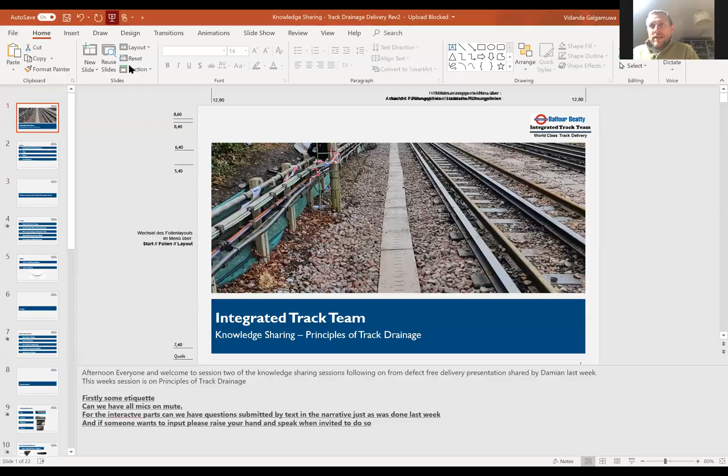John graduated with a bachelor's degree in civil engineering from Cork. I'm not sure if it's a coincidence that the first two presentations have been done by Irishmen - in historical parlance, I would say we'd be called cannon fodder, but on a serious note, John has an extensive CV, working initially across heavy civils projects and infrastructure projects.

He joined ITT in 2013 and has ever since been the go-to guy for anything drainage related. He's going to share some of his expertise today on his experience renewing the tube's extensive and varied drainage system over the last 7 or 8 years. So without further ado, I'll pass it over to John.

Thank you very much, Damian, thank you for the glowing reference. It's hard to believe I've been here for 7 years, but seven very enjoyable years. So thank you for giving me the platform to pass on some of the knowledge I've gained over the last 7 years working on Track Partnership and ITT, and sharing it with wider audiences.

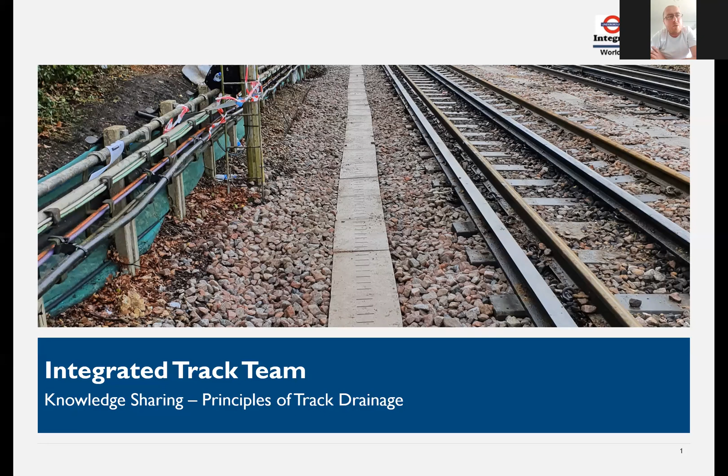Quickly going through the agenda for today: first, we're going to look at what purpose track drainage serves. Second is design - some of the design requirements you need to look at for a good design. Third is materials used, some existing and some new. And finally, we'll look at renewal techniques, both traditional open cut methods and trenchless techniques like CIPP lining, pipe jacking, etc.

So what purpose does track drainage serve? I'll give people 30 to 60 seconds to throw out some suggestions - there are 5 in all, and then I'll run through them.

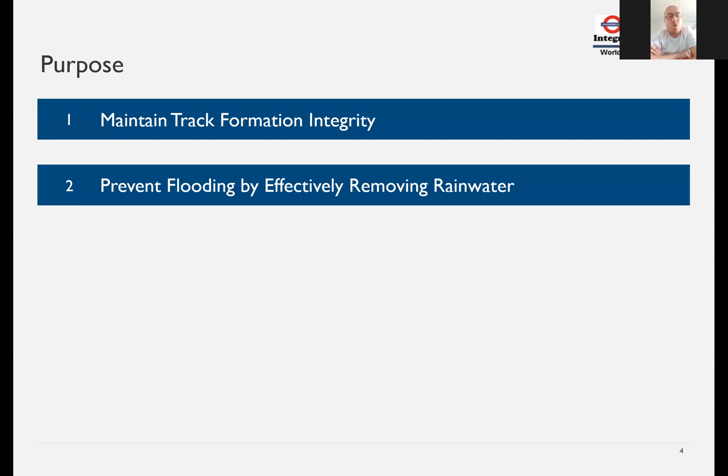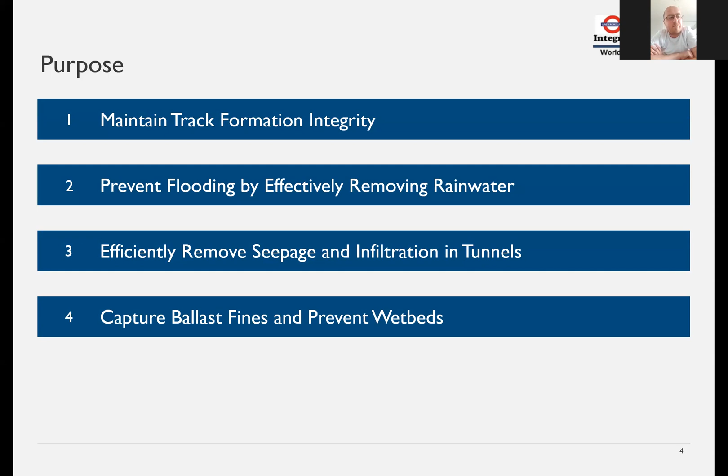So yeah, I've seen a few come through there. A few people obviously have a bit of knowledge already.

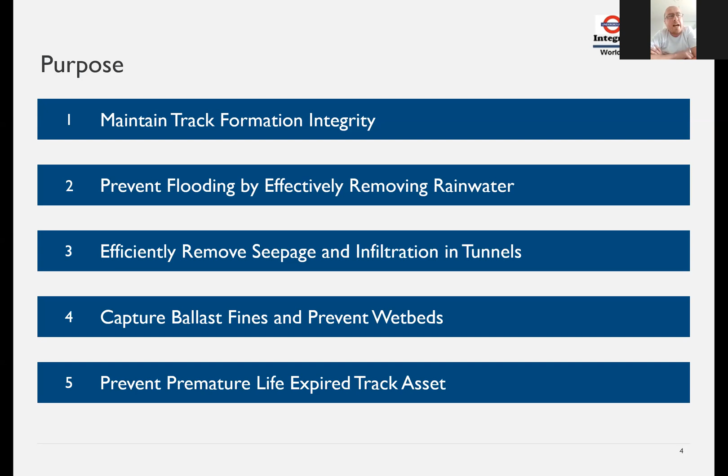There are two types of main drainage: positive and natural. Positive is basically pipe, channel, ditched drainage, and it's required when there's no natural percolation through the ground - so where there's a solid invert to the track, such as a viaduct, bridge deck, or tunnels, where the subgrade is impermeable. So if you have a silt or clay material, where the capacity of the subgrade to accept water is poor. That's common when there's soft chalk, and also in areas of flood risk, which are low points in the track. Natural, in effect, is the opposite - it relies on the ability of the ground to accept rainwater flows. That's in areas where you have good sand, gravelly, good quality permeable chalk. You can also have sustainable drainage systems like soakaways as well.

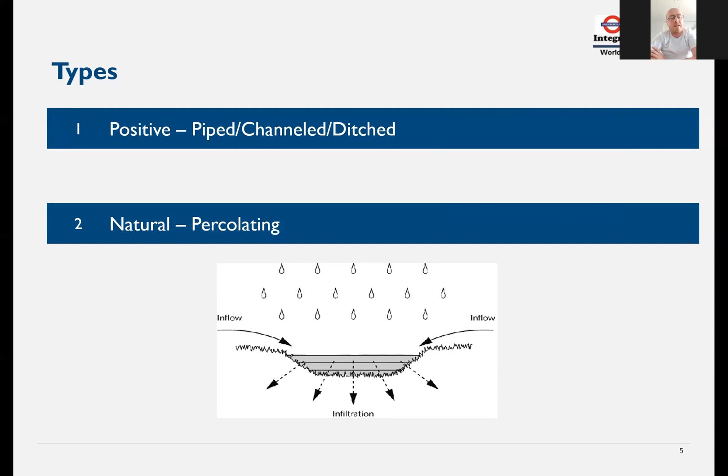Moving on to the design. There are five key requirements with the design. The first one to look at before you commence the design is to review the history of flooding in the area, any reports on flooding and such like that.

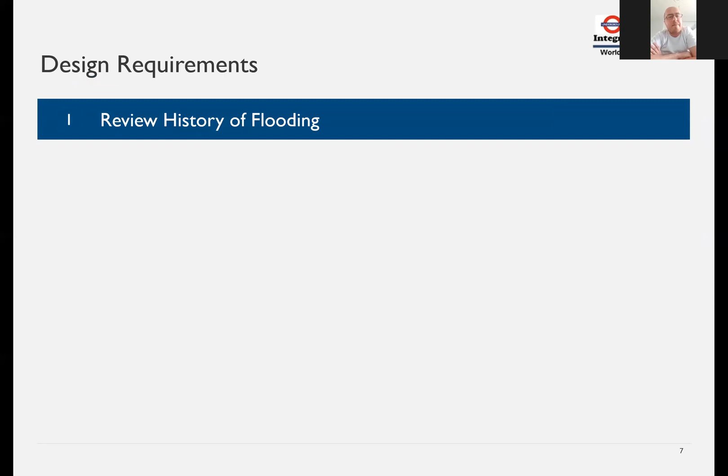Then you review the site hydraulics. This involves assessing the catchment in its entirety - surveying the catchment, identifying the location of the pipes, the size of the pipes, and then modeling that existing catchment and seeing how it reacts to different types of storm events. So 1 in 5-year storms, 1 in 10-year storms, 1 in 50-year storms. Once you have that, you can see the impact the flooding has, and then whether you need to upsize pipes to meet the requirements of the modeling you've inputted.

Once you've identified your proposal, you can move on to review the condition of the existing pipes. You look at the condition of the existing pipes and the requirements of the proposal, and see in the catchment where you might be able to retain some pipes. For example, you might have a pipe which hydraulically works, but structurally has holes or fractures. So it might work hydraulically and be the right size, but need some renewal work - you might need to line it, not necessarily a full renewal. By establishing the structural serviceability issues of the catchment, you can identify what work you need to do, giving you a defined line of what to retain, what to renew, and what to rehabilitate by CIPP lining or slip lining.

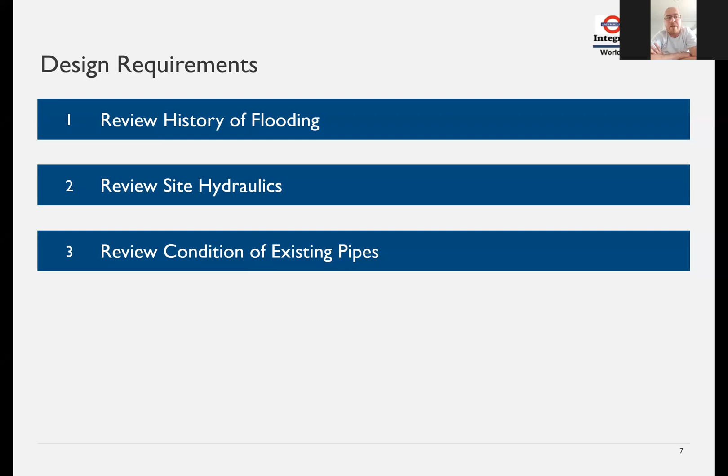Number 4 is construction technique and buildability - making sure the design is buildable. We've had many instances where designs were issued for approval for construction, and when we walked the site, we realized a lot of the design input wasn't feasible. For example, open cut renewal where signals are in the way, channels to be installed where signals are in the way, or other places where there's insufficient space to install drainage through bridge abutments or through narrow six-foots. So it's critical that what you put down on an AFC drawing is actually buildable.

And finally, the last design requirement is to highlight areas of high risk - areas where you're excavating over Thames Water sewers, areas where you might have potential asbestos intrusion, Japanese knotweed, stuff like that.

John, before we move on, there's a question that's come up. Someone's asking, what do we do first - generally what's best practice, a P-way track renewal or to do the drainage first for a renewal?

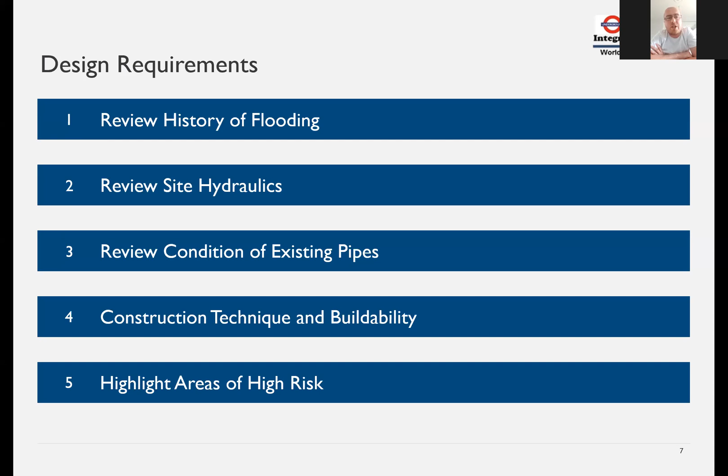Ideally it'd be drainage first, particularly if it's pipe. If there's a risk that the drainage may be damaged by a track renewal, then obviously you do the track first - that's generally the case when you install channel. I know when they did the renewal at Wimbledon, doing pipe and track together, the line of the channel was impacted while trying to do the track bed formation. Also up at Harrow, we commenced installing some channel, but once they did a P&C renewal, the channel basically moved and got damaged, so they ended up stopping the overnight renewal - we were doing the channel overnight and decided to do that post the works. So to answer your question, as much as possible, especially if it's a pipe, but when it's channel, it's best if it goes in second.

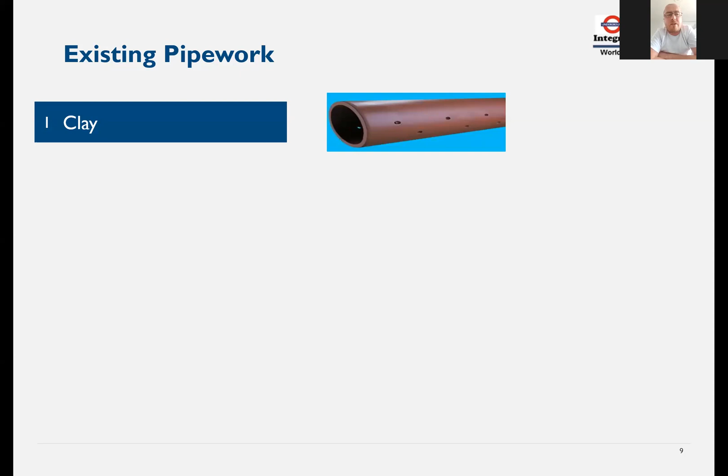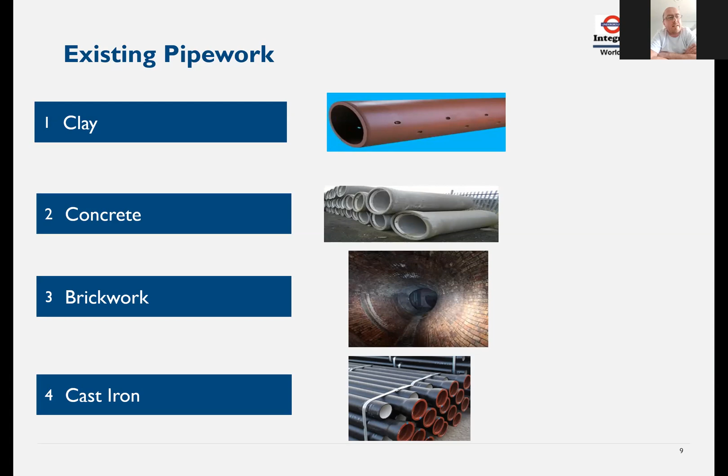That's probably the second most common. Thirdly, you have a lot of brickwork, especially brick over culverts in the subsurface, like down through the District line. These can range from 400-450 mil diameter up to as big as the ones at South Kensington platform, which are 1100 wide by 800 high - quite big structures, dating back to the 1860s, there since the track first went in. You also find bits of cast iron here and there, though not very common.

There's a question from Declan: does installing a drainage channel eliminate the need for crossfall when carrying out a BTR? No, because you should always have crossfall, since it needs to fall in the direction of the drainage. If you don't have crossfall, it's probably just going to sit in the track bed. So it needs to be cut in the right direction toward the drainage.

Regardless, that track channel will need to be below formation in order for it to be collected and work properly. There's also a question from Zach: at what point do we capture the effect of infrastructure development around an area, as this can affect site hydraulics? Runoff from associated infrastructure would be picked up in the hydraulic modelling of the catchments - the micro drainage model will pick that up as part of the hydraulic modelling when you set all the storm events.

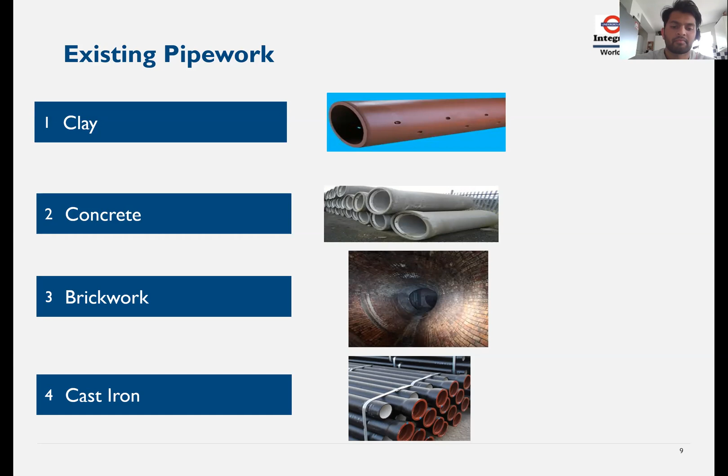Moving on to some of the new pipework we install - most common is plastic pipe, and there are two types we generally use. The first, on the left, is a Rigitrack pipe - a lightweight poly pipe, twin wall ribbed, only 18 kgs for a 6 meter length. It has a longer length so fewer joints, but needs coupling - unlike the pipe on the right which is a push fit connection, this one needs a collar for every joint, which is a bit more painful. It's measured by internal diameter and comes in sizes from 150 mil up to 600 mil, and is more environmentally friendly than the pipe on the right because it incorporates recycled plastic in its makeup.

The pipe on the right comes in two types: a Terraline, which is a solid pipe, or a Terradrain, which is in effect a filter pipe. It's heavy duty, quite a bit heavier than the poly pipe - a 3 meter length of 280 is about 40 kgs. But it's very durable and heavy duty, so it probably has a better long-term life cycle than the poly pipe. It also comes in different classes: SDR11 or SDR17. SDR11 is for a shallower depth and for areas of higher loading.

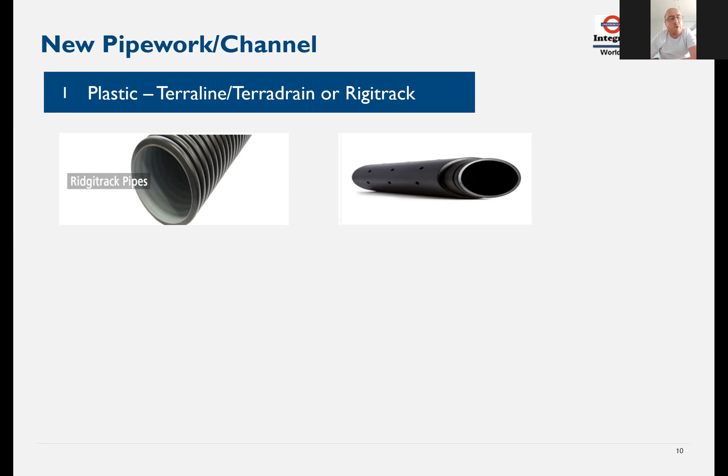Moving on to channel. Channel comes in two different sizes, a 150 or 300 mil internal diameter. Each unit, whether it's a riser or a base, is 750 mil long. Usually the makeup is one base, 3 risers and a cover, in order for it to get below the track formation and effectively drain the formation correctly.

One thing about channel is there's a lot of manual handling. For example, if you're installing a 3 meter length of channel with 3 risers in the same area, you're installing 20 units including lids. That means there's a lot of on-site storage required to lay out the channel and prep works, or more space required on the trains compared to pipe.

It's also quite more expensive, approximately 10 times per meter length than a Demco pipe, which is the Terraline pipe, the heavy duty stuff. The advantage of channel is its greater storage capacity. It works better hydraulically in flatter catchments, and due to the extra storage capacity, it doesn't need to be as deep, so it can be installed shallower.

One other point is it's supposedly easy to maintain, but that's a bit debatable because we've had issues trying to clean it out in the past after we installed it.

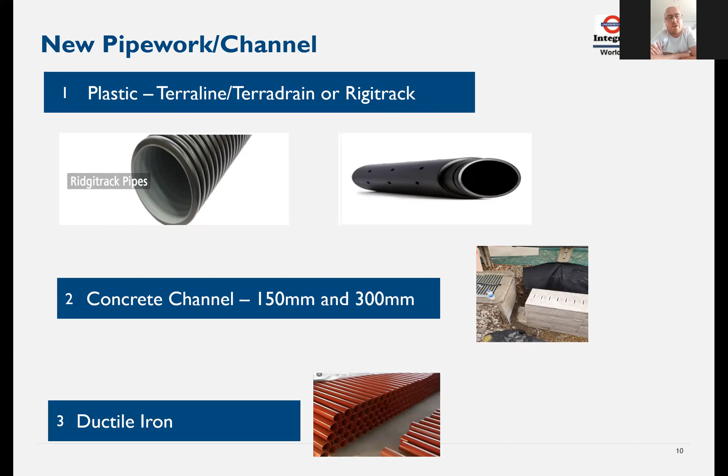Finally, the other pipe we use is ductile iron, which generally is only used in shallow UTXs and 4-foot drainage. We've used a bit of it in B2F and installed drainage up to 4 foot, but other than that it's not really used very often.

Before we move on, John, a couple questions. Simon's asking, why do we install channel rather than pipe? What's the decision process behind that? I guess it's probably down to the hydraulics.

Basically it has greater storage capacity. So even if you install it and you don't need the entire capacity, with climate change and stuff, you know there's built-in space and storage for the future. You might be installing pipe work which is satisfactory for now, but maybe in 20 years' time, due to climate change, your hydraulic volumes might be larger. So at least you've built in capacity with channel.

And as I said, it also works better in flatter catchments, so it's just better to install channel in flatter catchments than it is pipe. So those are the two main design reasons.

Lee also asks, is there an opportunity to use GRP channel in the future instead of concrete channel, maybe to keep cost and manual handling down? Yeah, that was discussed at the drainage hackathon a few months back. The supplier of the concrete channel who was there said GRP would definitely be an option, but we need to get back to him with almost set meterages of what kind of meters of channel we'd require.

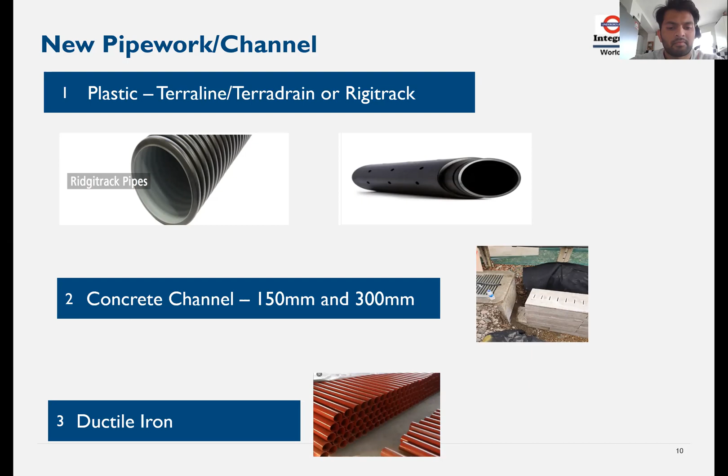Moving on to the next slide, running through the materials we use. Starting from formation up, the geotextile we install is Terratex, the same as predominantly used for the track. This is to prevent the movement and loss of fines from the track sub base.

On the drainage Terram, you overlap the upstream geotextile on top of the downstream. This is to prevent ingress of subgrade fines, and should be lapped with the track geotextile or else rolled down protected. If the BTR hasn't happened before the drainage, generally the Terram is brought up to track formation, rolled up in a 500mm lap, and drainage guttering placed on top. So when the track renewal happens, the drainage Terram can be lapped into the track Terram, giving integrity and uniformity of Terram throughout the track formation.

If the drainage happens post, then the drainage Terram needs to be lapped into the track Terram, which should have a bit of through overlap.

It's a single size filter, so it's usually a 10-20 shingle. In areas where you can reduce the shingle bed down to 50mm, but in areas where you have to reduce less than 50mm, it needs to be bedded on a C40 haunch. Otherwise, you don't get this effective support on the pipe, and it will just settle.

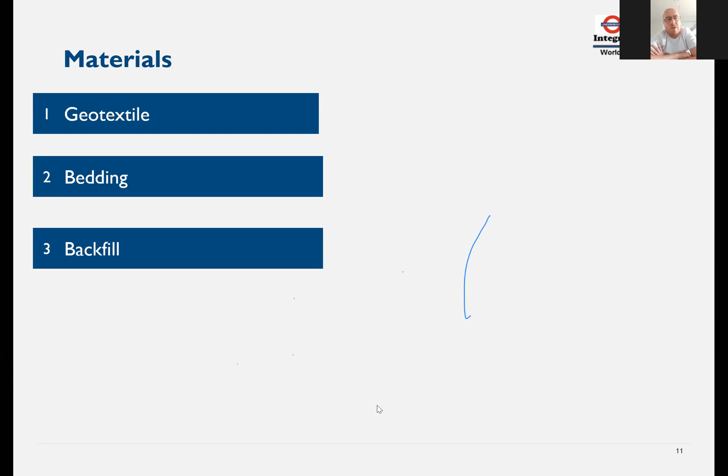In the carrier drain, you can basically backfill on top with a selected fill. So in effect, it's just good quality material with no rocks, bricks, tree roots, stuff like that. So that's basically for carrier drains.

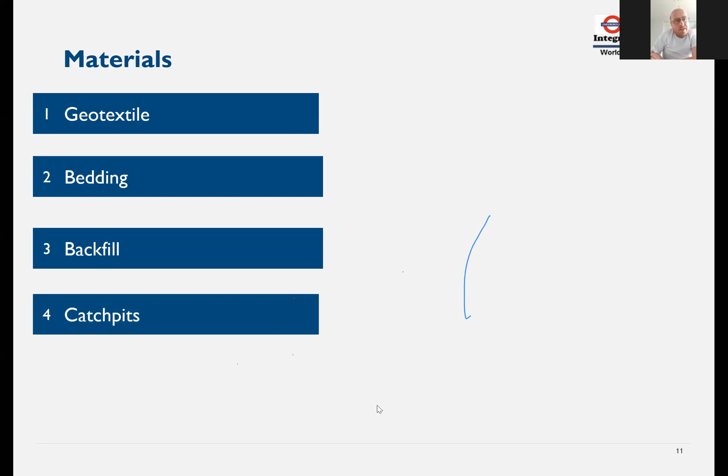Then moving on to catch pits. Catch pits are required to inspect and maintain pipes. They should be no more than 30-meter spacing.

That's basically generally for new designs. There should be a change in direction or a pipe size, and they should have a sump to collect debris and silt. You don't need to have every catch pit or every chamber as a catch pit, but you should have as many as possible - I think at least one every 3 or 4.

It also provides access for pipe inspection and maintenance. So obviously, if you need to carry out any CCTV and jetting, the chambers need to be of a certain size, which is generally 1200 by 600, so you can get man entry to clean and jet.

So the GRP rings are at 150mm depth, and then they're just built up to the sleeper level as required. The top ring has a recess, so you can fit a GRP cover.

Cubis also supply reduced Cubis catch pits, so they're 530 by 380 internal diameter. They're non-accessible, so they can only be manual. You also have a combination.

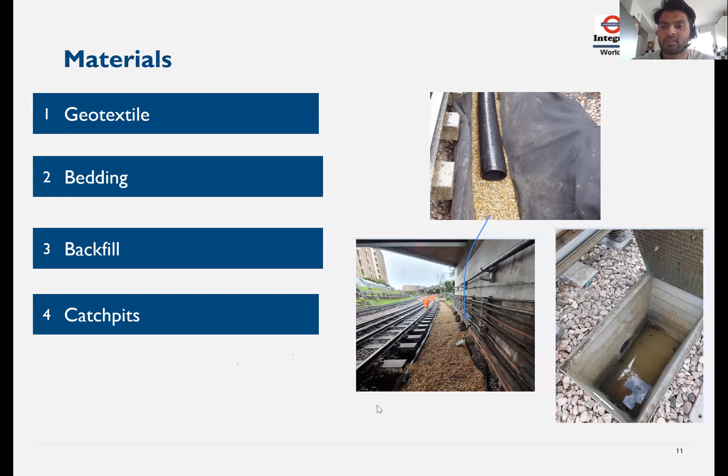So moving on to some of the traditional open cut. Traditional open cut basically is excavation from track level, and it involves either removing the existing drainage or installing brand new drainage. By doing that, you install new pipe, new backfill material, and new ballast, so in effect giving a brand new drainage pad, which is almost guaranteed to work. It has a long asset life, and sometimes it's the only way you can address hydraulic modeling issues.

As I said, if you can line pipe that's fine, but obviously you can't upsize pipe by lining. So the only way you can generally upsize pipe is by open cut renewal, so that's why we use it. Obviously in some instances the pipes cannot be lined, so open cut renewal is the only option you have.

So we deliver these in either possession or engineering hours. For possession, typically we deliver 30 to 150 meters per working crew in a 52-hour closure. This meterage would be less than a 6 foot. This is down to the fact that there's a restriction imposed by the ORR a couple of years ago, so we can't have any engineering trains stabled next to open trenches. So what we've done to work around that...

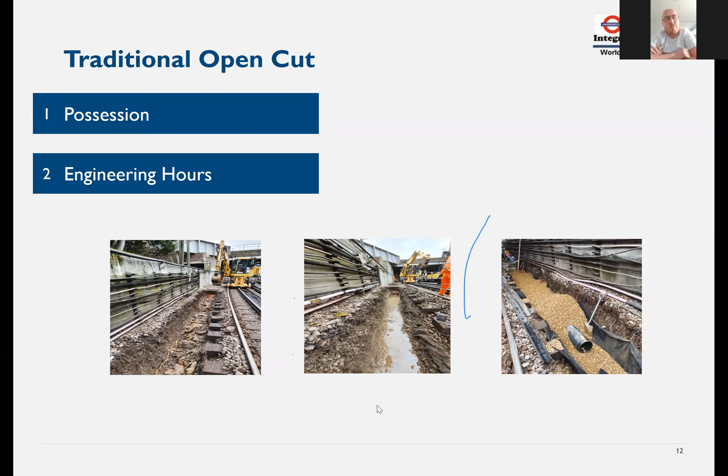Yeah, so that's all to say in traditional open cut. So just to move on, we're going to have a quick quiz. I'm going to hand over to Vid to run you through this. So yeah, all yours, Vid.

Cheers, John. So if everyone can go on kahoot.it and enter this game pin, you should be able to log in. I'm just going to share my screen with you. Just bear with me. Can everyone see that? John, can you see that? Oh, there they are. Yeah, I can. I've seen Jacob joined, Len's joined, Matt's joined. I'll wait for a couple of minutes to let more people join and then we'll start the game. Okay, wait for one more player. Okay, so we'll just start this with 20 players. Let's see how this goes. Here we go.

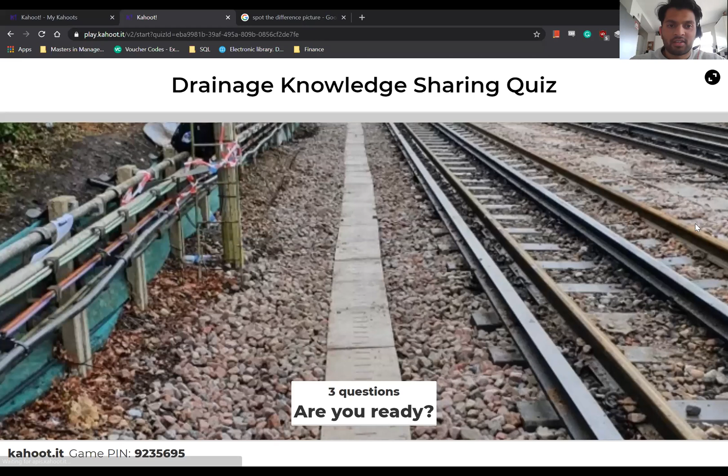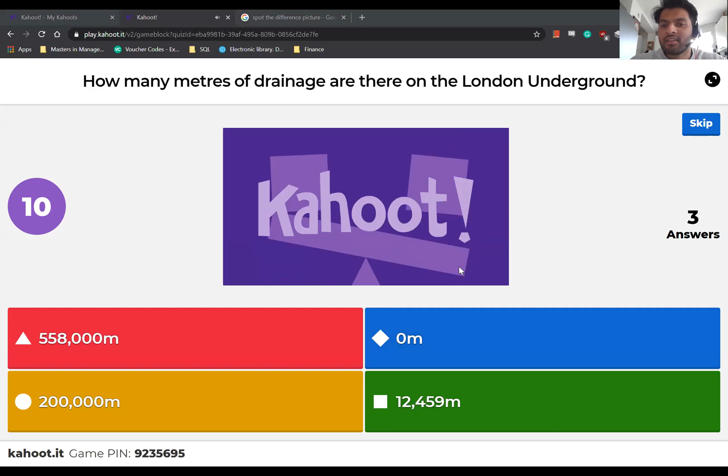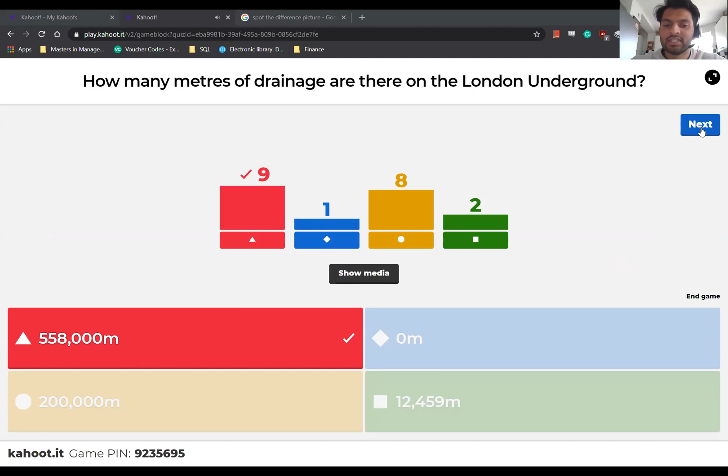So this is the drainage knowledge sharing quiz, 3 questions, hope you're ready. How many meters of drainage are there on the London Underground? Is it 558,000 meters, 0 meters, 200,000 meters, or 12,459? Got 20 answers. There you go, 558,000 - 9 people got it right, pretty impressive. Moving on. Oh, Rudy was the quickest. Nice one.

So what is the design overlap between track and drainage geotextile? Is it 300 millimeters, 150 millimeters, 250, or it doesn't matter? I hope no one picks that one. There we go, 10 people got it right. 10 people weren't listening, unfortunately. So let's see the scoreboard. Oh, Matt jumped right into the front with Owen in a close second.

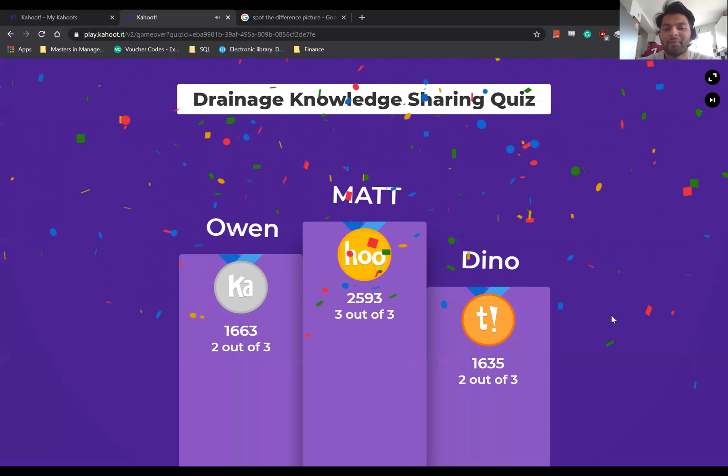Final question: what is the total amount of water in litres pumped out of LU in one day? 500,000, 5 million, 85 million, or 35 million? There you go, 5 people got it right. 85 million was the right answer. So let's see who's made the podium. In third place, we have Dino, nice one. Second place, Owen, very impressive. And number 1 is Matt, nice one Matt. I think John's got a present for you. Quick runners up, Jonathan and Ang.

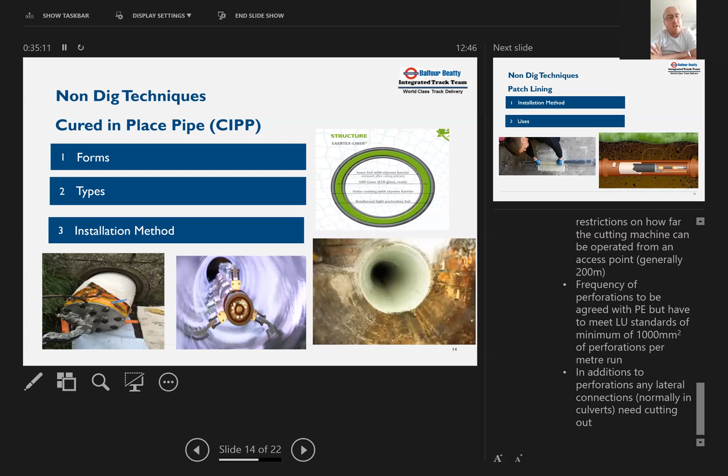So once you've satisfied that the pipe is ready to be lined, a liner is pulled into the host pipe. That's done by having a winch at one end and the liner positioned at the other, with straps placed around the liner, and then it's winched in through the host pipe. Once it's put in, a light train is inserted - that's the instrument in the middle picture - basically an instrument with UV bulbs which cure the liner.

Once the light train is inserted, you fit the end cap, shown in the picture on the left. End caps are used to calibrate the liner. Basically, once they're fitted either end and the light train's in, the liner is then inflated so that it's tight to the existing circumference of the host pipe. So it's a tight fit.

The calibration and curing is controlled by lorry-mounted equipment, generally at road level, but there's a limit to the distance it can be from the location you're lining. Generally it can't be more than 300 meters away, because that's the set amount of extension it has. If it's any longer, the pods will need to be lifted on track at the nearest access point and then brought to site using an ORV.

Curing time depends on the diameter and thickness, but generally you're looking at 700 to 800 millimeters per minute, so it's quite quick. In an engineering hour shift, you can cure a 225 up to 40 or 50 meters, no problem, because we cured at Acton Town platform grounds - there's 35-meter, 600 brick culverts. We cured them in engineering hours. That's talking circumference in comparison to a 225 pipe. That was pushing the limits, to be fair, but you've quite a big output, and it can all be done in engineering hours.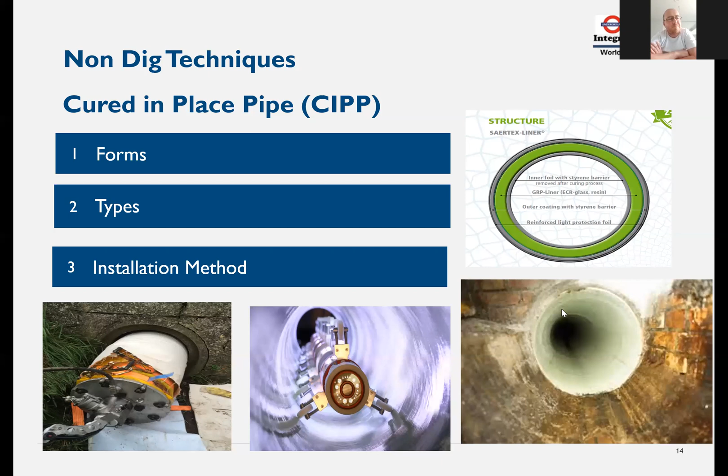Slip lining is the process of inserting a new pipe inside the host pipe. Normally it's done with an HDPE pipe, or sometimes we need to use steel to reduce the pipe diameter. By inserting a pipe inside a host pipe, we're reducing the size of that pipe, which can impact the hydraulics. By installing steel pipe, it's going to be thinner because of its characteristics, which helps if you need extra volume for hydraulics to work. Basically, it's just pushed into the host pipe, and then it's either welded together or tap screwed.

If it needs to be perforated, for example if you have incoming laterals into the existing host pipe which need to be maintained, it'll need to be filled with shingle. You use equipment called shingle blowing equipment, a Venturi system, which basically blows shingle using compressed air. You need to create openings on top of the culvert or pipe every 5 meters, and then blow shingle either way.

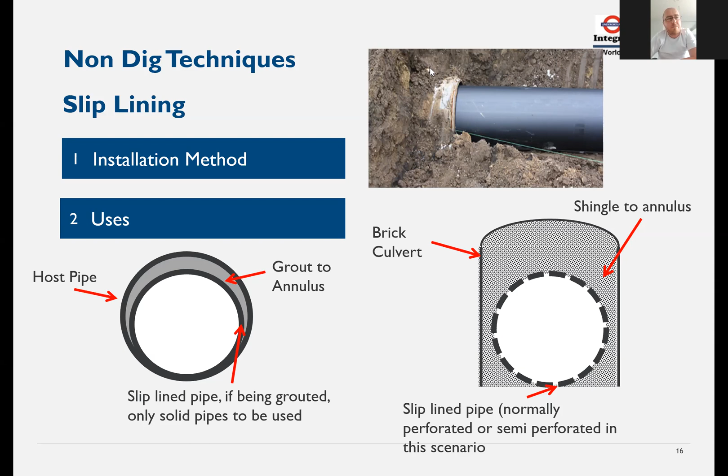Moving on to the last one, which is pipe jacking. Pipe jacking, in effect, is another way of inserting a new pipe inside a host pipe, but this is done using a hydraulic ram. It can be steel or HDPE, just like slip lining, and it's generally used on longer lengths. So slip lining is used in shorter lengths, pipe jacking in longer lengths, or if the host pipe has more severe deformations that you can't winch through or push through.

What you see there, you have the actual jack arm halfway down the attachment, so that'll be pulled back. You drop in a section of pipe and jack it forward, and then weld it on. You drop in another section, weld that on, and then jack it forward. You continue doing that until the whole run is lined.

Generally, because of the size of the chambers and the frame we use, you use pipe sections of about 800 to 900 mil. If using steel pipe, it will generally be welded, and if it's plastic pipe, it will be self-tapping screws or pegs.

You do need quite a bit of a storage area for the plant, because as well as having the kit inside the catch pit, you also need pumps, and a power pack to actually operate the hydraulic jack. So you need good storage areas adjacent to where you're doing it.

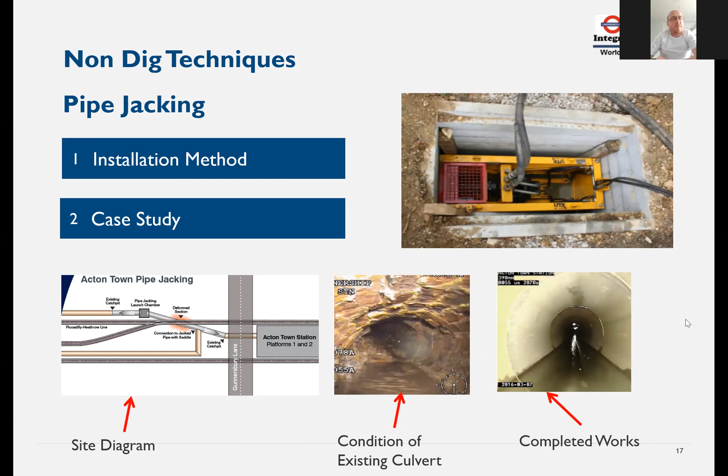All right, okay. So that's basically the three main non-dig techniques we use.

Before we move on, I think Chris made a statement that there is a potential project for CCTV across the whole network. So maybe that's something we should relook at, and see if it is still cost effective to give out to third parties. I thought I'd just capture that. Yeah, that's definitely worth looking at. Yeah, definitely.

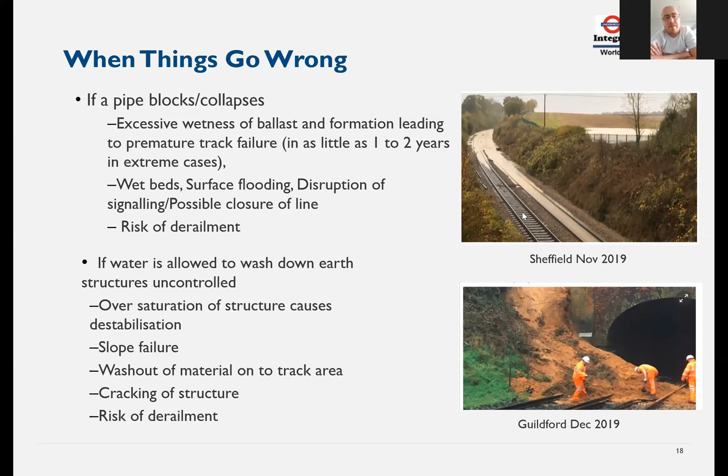So if there's any ballast shoulders which just disappear and don't make sense, there must be a reason for that - it's usually underlying drainage issues. Any drips or significant wet patches on tunnel walls, standing water or wet beds, obviously a major issue. Any bulges or slippages from earth structures, catch pits with broken or missing covers.

Also catch pits which have plywood inside supporting them - often the case where catch pits have been damaged and people have just done a temporary repair, wedging it with two pieces of ply either side and a bit of 4x2, just hiding the issue. But that can fail and cause a big void under the track. And also standing water within catch pits, where you can't see the pipe - that highlights there's an issue downstream, a blockage, because the water is just standing and not getting away.

And also high levels of silt and debris. So obviously, if a catch pit is full of silt, it can't carry out its duty. The water can't get through, and basically the water just stands there, not functioning correctly as a drainage system.

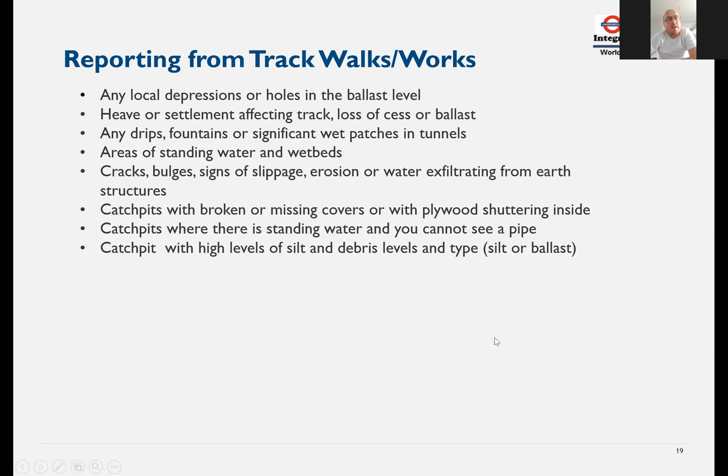So in summary, track drainage plays a vital role in the life cycle of track and shouldn't be seen as secondary to track. A good design is paramount to good delivery, and there are numerous varied renewal techniques available to rehabilitate and renew existing drainage.